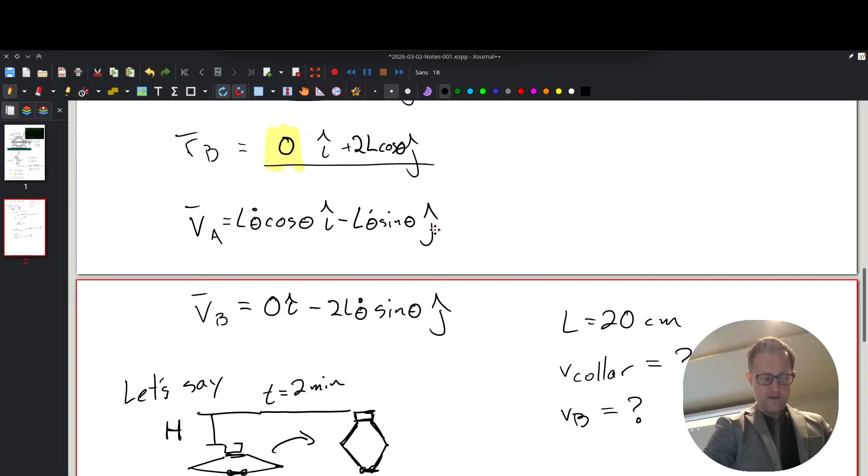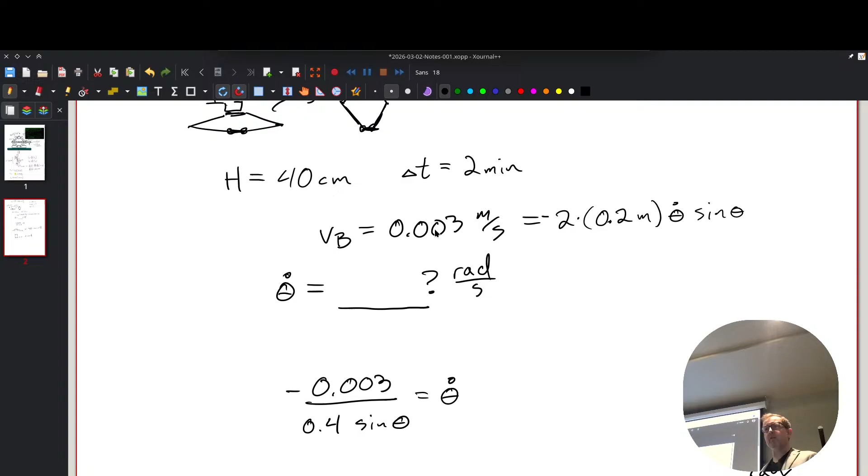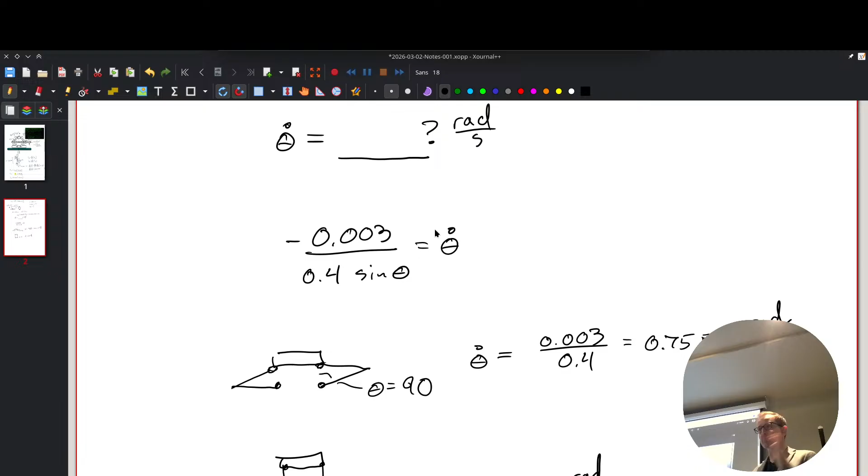The last thing we did was figure out that if we want to move the car at a constant 3 millimeters per second, turning the crank and raising the car slowly, then the angle of our jack changes at a certain rate. At one point it's 0.0075 radians per second, pretty slow. But by the time we get to the top, we need to move this thing at an infinite number of radians per second.

So the question is: is that possible? Is something wrong with the way we modeled things? Is this real? What's going on? I wanted to come back to this point where we figured out that if the top is moving at a constant rate, the rest of it is not moving at a constant rate. I wanted to come back to that and figure out how to deal with this.

What are your initial thoughts on that? Can you rotate something at, let's not call it infinity, let's call it 6,000 radians per second? Can you do that? Yeah? Maybe? Theoretically? Okay, theoretically? Maybe?

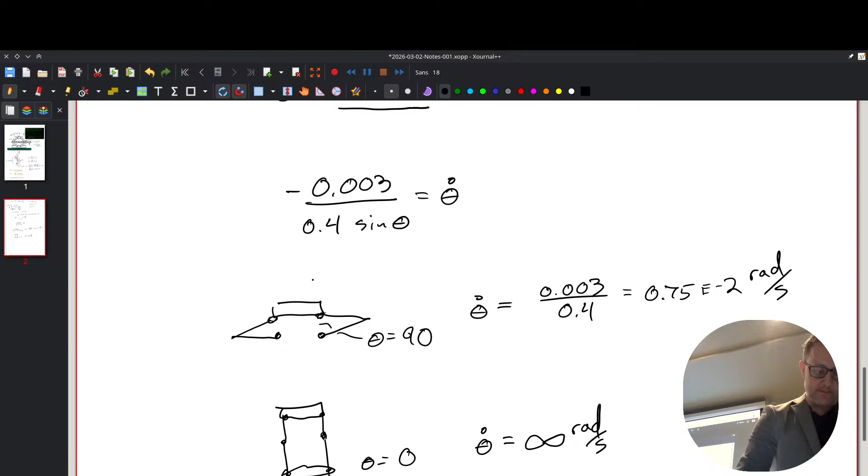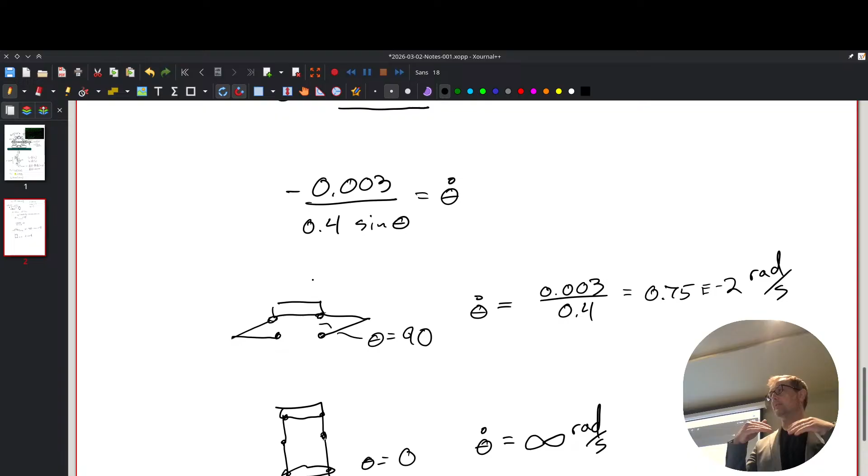But as you think about these systems, it is real—you can have real, very quick changes like that. They're not infinite, but they're big. In reality, it slows everything else down to match up those constraints.

So the question is, are we happy with this constraint that we want the car to move at a certain rate, or do we want to go back and revise that and say maybe the pin should be moving at a certain rate? Do you know what I mean by that? Since we're going to be turning the crank, rather than saying the crank has to change how fast it's moving to make the car move at a certain rate, we could say the crank's going to move at this rate, and the car is going to do anything it needs to keep up with us cranking it. What do you want to do? Sign, seal, deliver, or revise?

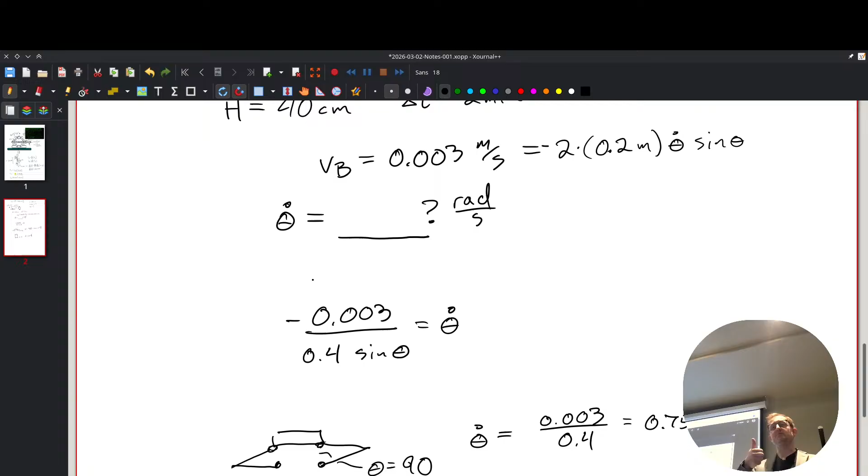This is your chance, you get to do an engineering decision. Revise our constraints, because we put a constraint that the car has to move, but we could change that constraint and say that the collar has to move. Do we want to say the collar is moving, or do we want to leave it as the car?

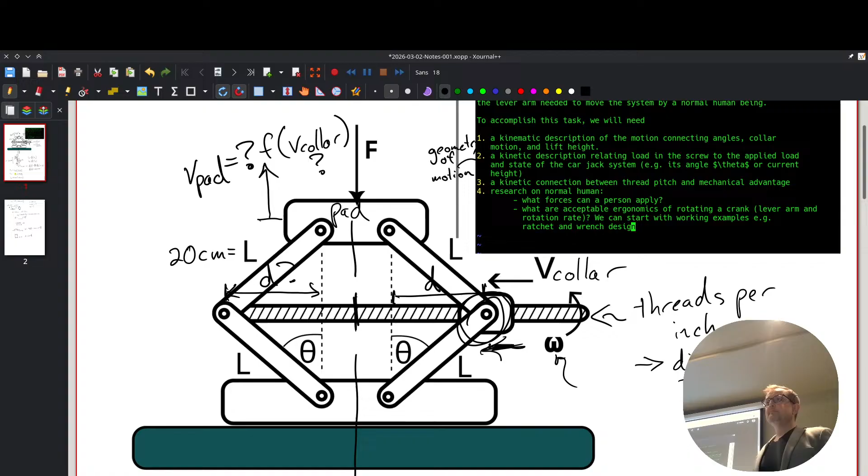I feel like since the collar is the most strange, like it's not straightforward movement, I think if we constrain that, it'll be easier to deal with the pad movement. You think it'll be easier if we go back and look at collar motion rather than just car motion? We can try it, yeah, because I feel like since it moves in an arc, it'll just make life easier if we say it's like a constant thing. Yeah, we could do that.

What do we think about that? It's more realistic to try it, but it's more constant than... yeah, if you're turning the screw, you're gonna keep decreasing the X position, right? Like that distance keeps getting smaller. Try it. All right.

So if we want the car to move 3 millimeters per second, I'm looking at my equations. Before we said the car is going to move at a constant 3 millimeters per second. Here, if I want this number to be 3, then this number has got to be double that, because this one's 2 times L theta dot, this one's 1 times L theta dot. So I could say 6 millimeters per second is my thread speed. That's how fast my thread is moving along. Seem reasonable? All right.

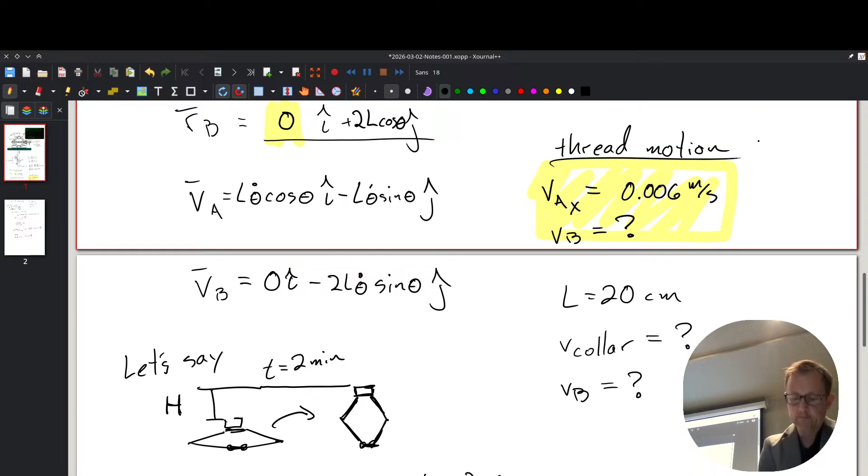So then we have this question. So if the thread's moving 6 millimeters per second, how fast is the car moving? How fast is the jack moving up? What do we think? We can give it a shot, see what we can come up with. You can even ask questions if you're not sure where to start.

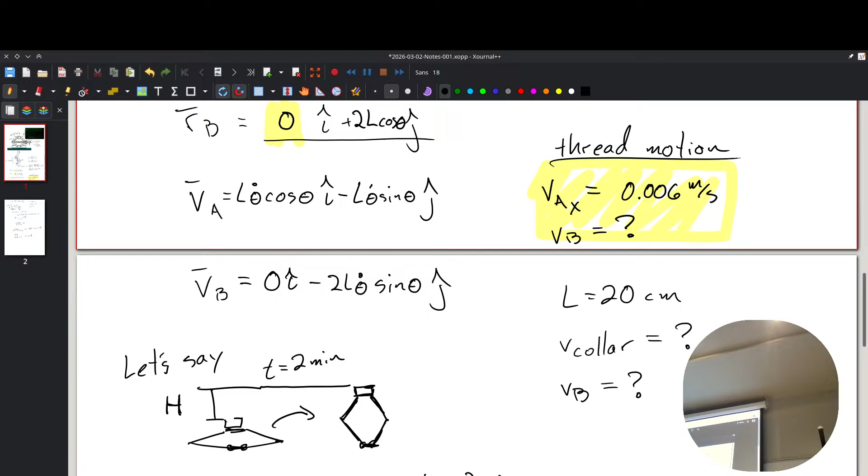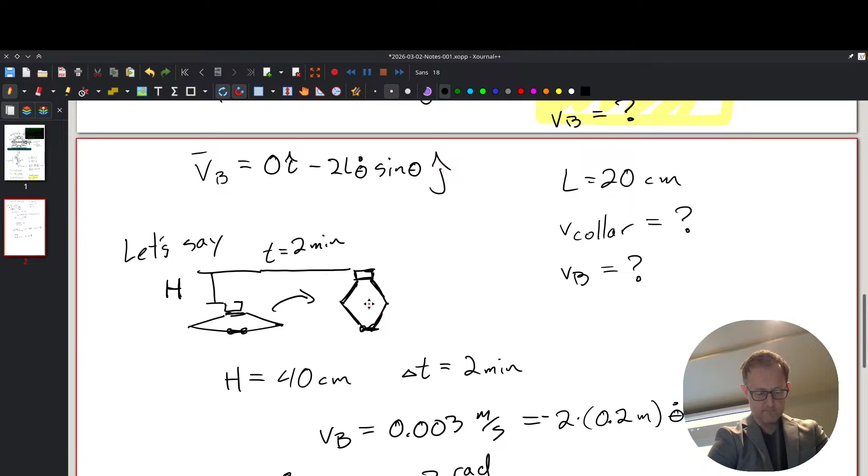So we had some time to think about it. Did anyone come up with a number or an equation for VB? If not, what questions did you come up with? Questions are just as good as answers. How do I fill in this question mark?

VA is 6, what is VB?

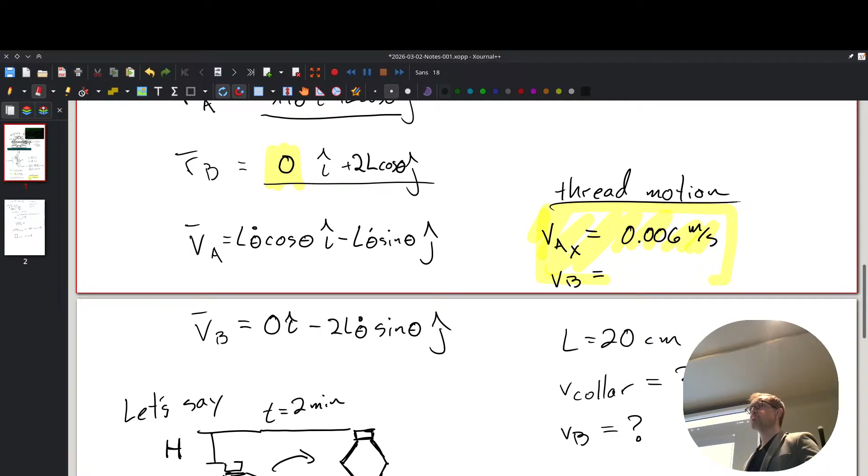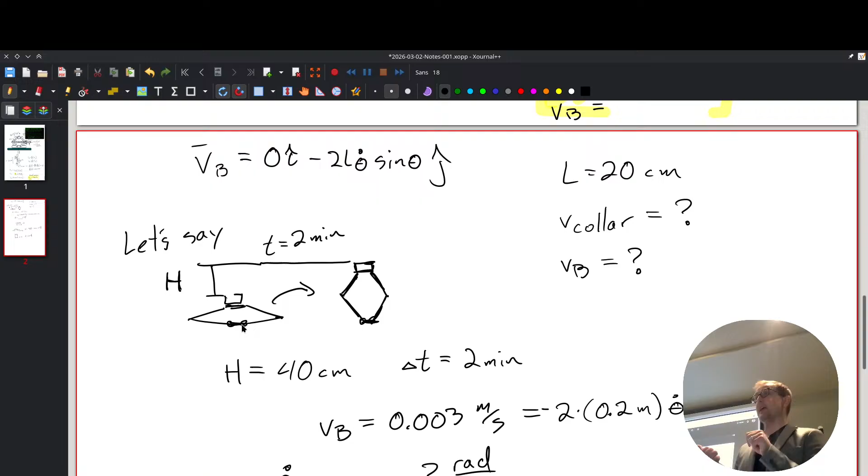VA, so on Wednesday we were talking about this - quick answer is VA is a chosen number. It's not that that number has to be for a jack. We did that based on if you're lifting a jack and it takes 2 minutes, assume that someone can move it in 2 minutes. We took total distance divided by 2 minutes and figured out 3 millimeters per second was our number. Thanks for clarifying. No, yeah, I appreciate it.

And then I doubled it, because if this distance has to be X, then we need to move this one 2X, or at least we want the speed to be 2X. Cool.

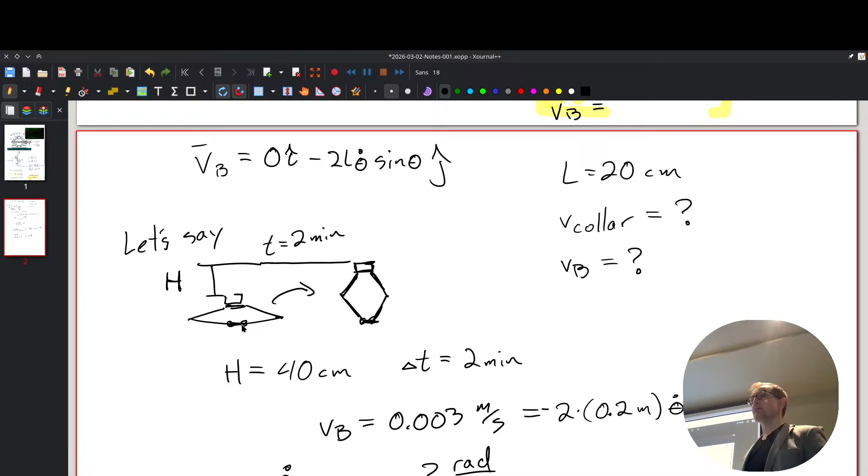What do we even do to get there? Is there a connection between collar motion and upward motion? Let's just think, do we think if I move the collar, the car moves up? Okay, so there's got to be some connection because it's still a 1 degree of freedom system. We're changing how we're actuating it. We're not saying we're pulling on the car, we're pushing on that pivot joint. There's got to be some kind of connection. Cool.

What about our constraint equations? Which one is the x component of VA? What's describing that collar motion? The L theta dot something. Yeah.

This is VA. We're saying that this value has to be 6 millimeters per second.

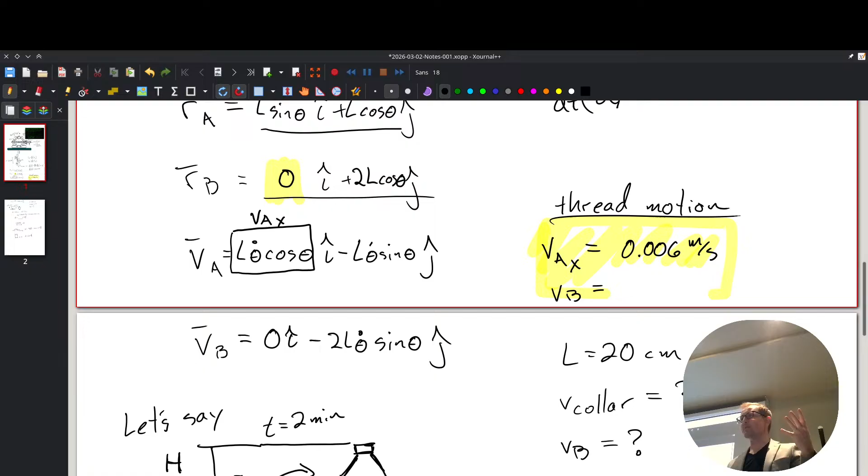Sorry, how did you get those equations? Those were given to me. I went to the top of a mountain and Moses was there with a burning bush, and he's like, from now on you will use these equations for these car jack systems. And I said, yes, thank you, and brought them back down the mountain. I'm being facetious, hopefully—it's Purim soon, so it's time to be fun.

All right, let's back up then. How do we get there?

The way I usually do constraint equations is figure out what are the variables that describe this thing. So to me, the main thing is if I know the angle, then I know everything about the car jack. And I have a mirror image of it over here, so if I know this one angle, I'm good to go.

So then I want to figure out where is A, where is B, in terms of—like what is this vector, RA? Really, I don't need that, RBA—but what is this vector, RB? Those were the two things I was trying to figure out.

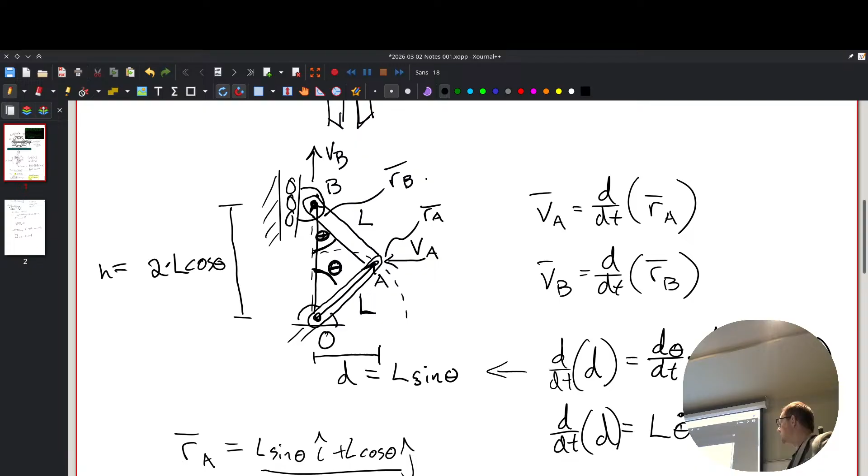And I figured out—I say it was a team effort, we did it together—we figured out RA is L sine theta plus L cosine theta. And then RB is 2 times L cosine theta, so double that, put it up top. And RB is always kind of zero in the x position, just moving straight up and down.

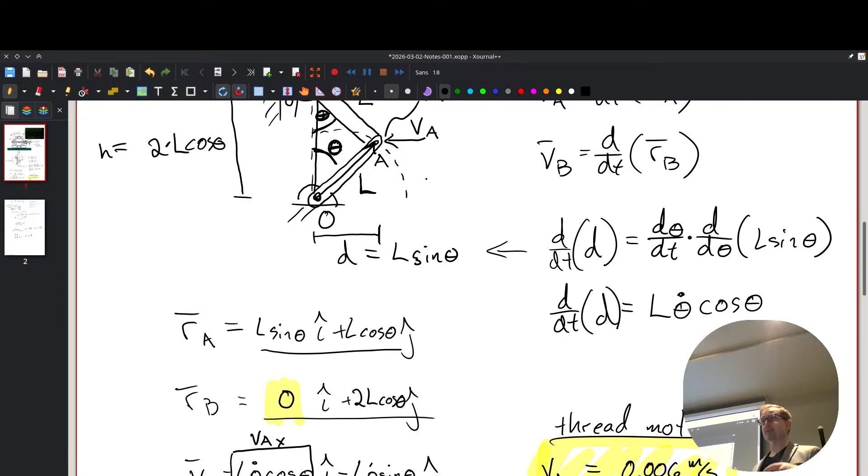And based on that, if I know constraints on position, I know constraints on velocity, because velocity is a change in position. So if it's constrained, it's still a derivative of that constraint. These two equations, VA and VB, are derivatives of RA and RB—that's where those are coming from.

And it's good to kind of walk through that. Even if you remember doing this, sometimes it's nice to walk through why we did these steps rather than just furiously writing down the math.

And it also helps because now I know that the x component is my constraint.

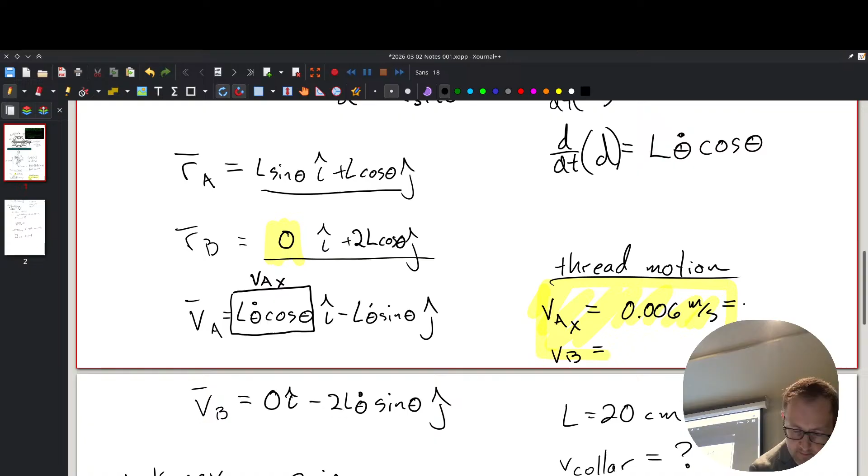Question? I was thinking, can we find theta—like set them equal, find theta, and then plug it into the RA equation? Or something like that. Or we can find VB.

Yeah, because it's a derivative, so integrating this is exactly true. Like this number we said, 6 millimeters, that is L theta dot cosine theta. And VB, this is 2 L theta dot sine theta.

So it's like we have two equations and one unknown, right? I guess two equations, two unknowns, because we don't know theta dot and we don't know VB. So we can solve for both of those since we have two equations.

How does that sound? You want to try that? All right, let's give that a shot and see what we come up with.

What was theta dot? If you think about A moving around in a circle, theta dot is how fast it's rotating. Technically, it's also the other one—rotation is going to go too, but here we've mostly just been talking about that bottom angle.

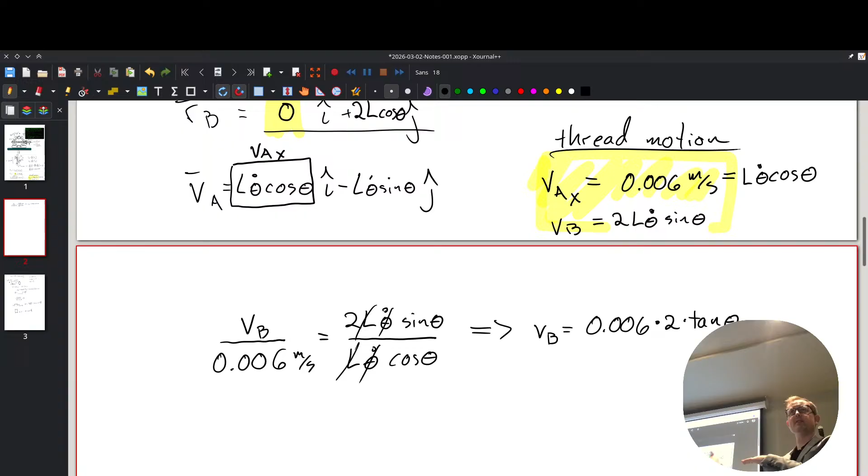Yeah, something that has to do with the fact that it's moving in a circle, right? That we're driving this thing upwards, but we're using a circle to do it. And that's okay.

All right, so when is this thing going to be 12 millimeters per second? Like, when is it moving at 12 millimeters per second? When is tan theta 1? At 45 degrees, yeah, so halfway.

That'll be like how fast it's moving when we're halfway there. What about when we're at 90 degrees? What's tan of 90? Zero, okay. A little weird. It's not going to be moving at all when it's at 0? When it's at 90? You'd say it's undefined though, because it's 1 over 0.

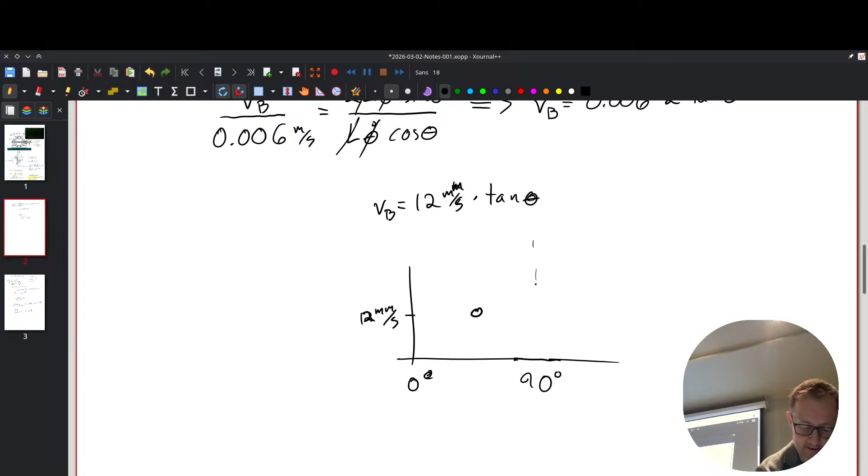Tan, is it 0 or 1 over 0? 1 over 0. All right, there's a 0 in there. All right. That's a tough part with crowd work, you never know what the crowd is going to give you. All right, so undefined, somewhere this way. That's our asymptote for tan. Okay, cool.

And then what about 0? That's our other kind of extreme. 0? Weird. Right, so we'll have some kind of curve like this, or maybe on average it is 6 millimeters per second, something.

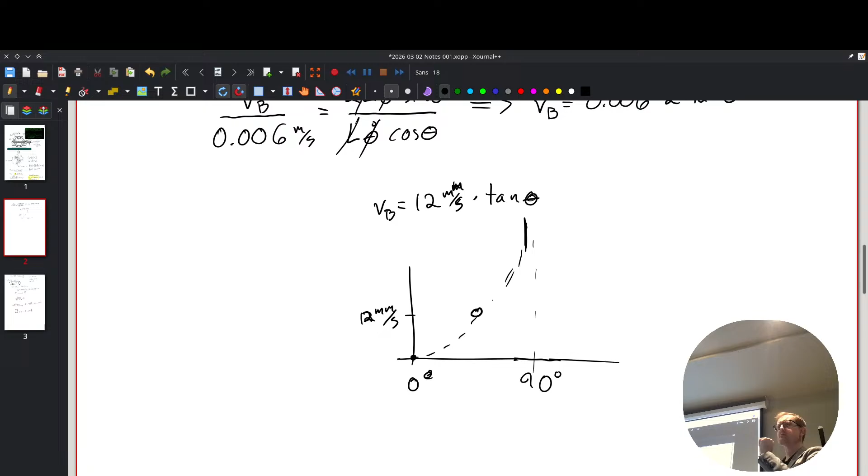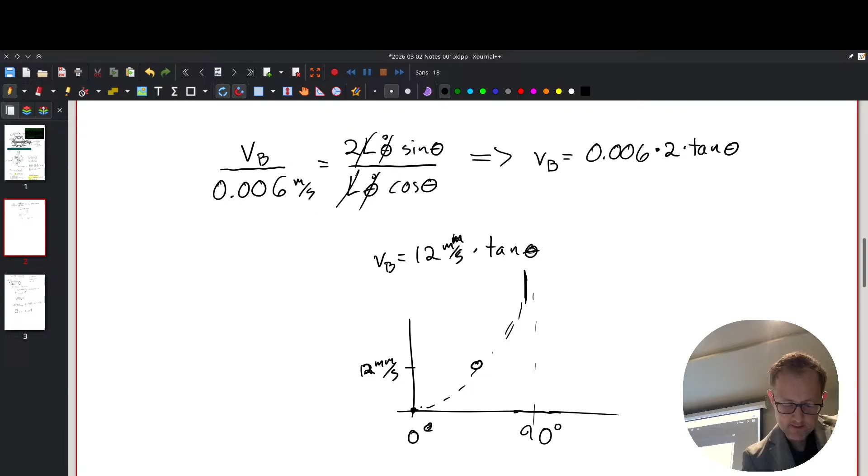What is it? Wouldn't it be like going down, like after it passes 45? Does it go? I think tan theta goes up. Which one? Zigzag? Sine 0 over cosine is 0. Oh no, you're right. Yeah, no, it increases. It's right? Okay, all right. I think it makes sense to me, but I'm not sure.

So it's a little weird, but we're not talking about things that the human doesn't have to make it move 20 or whatever, 20 meters per second. It's just the system will respond that way. Like we're just gonna move the screw at a constant rate, and we don't have to worry about everything else moving quickly. And we have a screw, we have something like keeping it in position, so it's not too big of a deal. It's a little, the beginning's a little weird, like when it is flat, you're gonna drive the screw in, but really, it's gotta like pop up. Most of the motion is upwards rather than inwards. But that's okay, we'll get there.

All right, that was fun. But now, nice part is we've got this relation, and we could even make it more general. We chose a number for VA, but really we could say VB is 2 VA times tan theta. So even if we go back and change, like, all right, I don't want to move it at 6, I want to move it at 10 millimeters per second, we have a general kind of relation between those. Because we did all the math work ahead of time to get to that point.

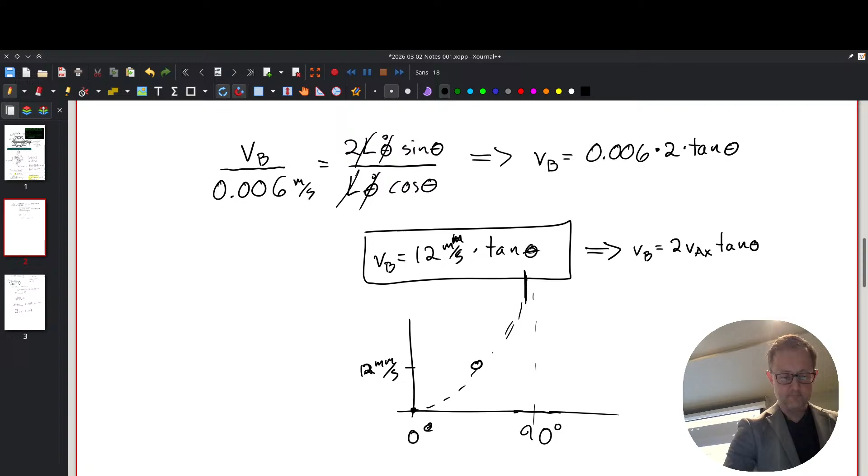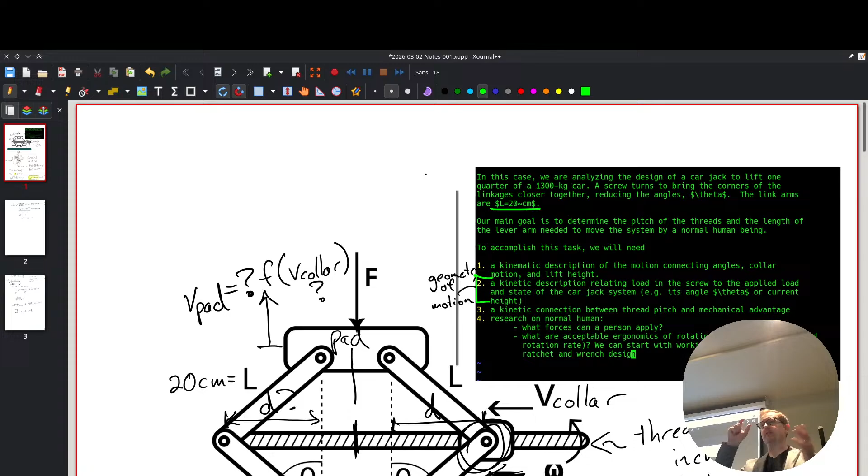I'm gonna scroll up and then come back down, because the next thing is trying to figure out our kinetic description for how much load the screw is holding. So we're turning that crank, and the screw is trying to hold the whole weight of the, not the whole weight of the car, but a quarter of the car. We said maybe a quarter of the weight of the car on Wednesday or Friday.

So now what I want to do is figure out what is the load in that screw. It's probably going to change. Like we already saw that motion depends on the configuration as the thing's moving. But that's the next step: what is the load in that screw whenever we have that load of the car?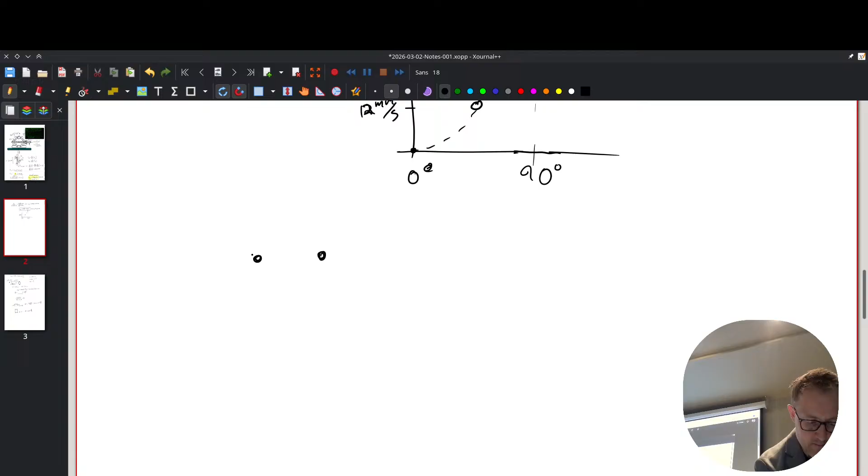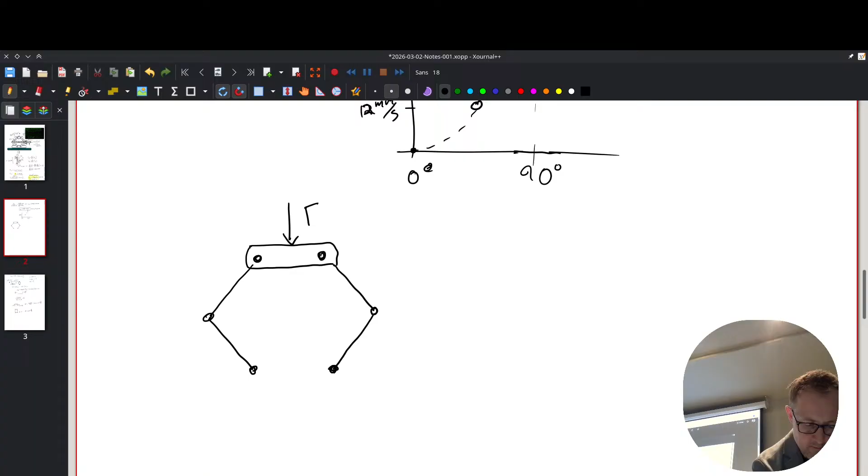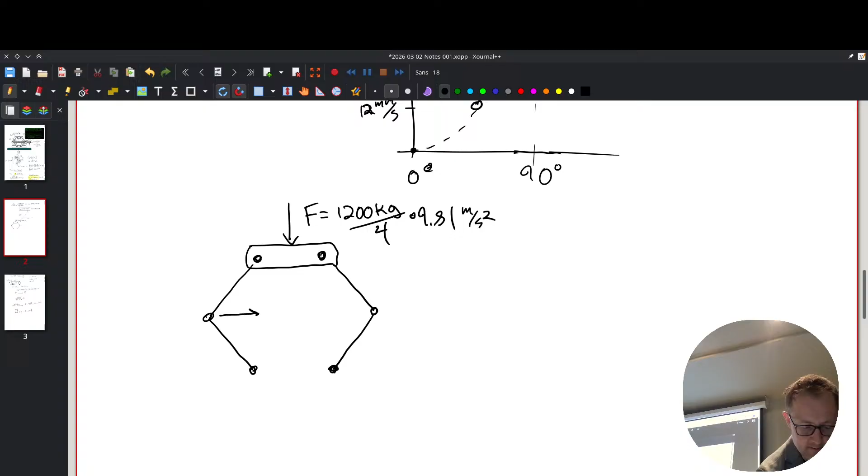We'll put times 9.81, so we have newtons instead of, so that I know that this is my applied load, and then let's do this. I know this is my applied load. The tension in the screw is the load that I want to figure out, like how much force that screw needs to hold.

What other forces do we need to look at? How do I finish off? What am I starting to draw here? The free body diagram? Yeah, so free body diagram. What's missing? Any other forces on there?

Yeah, there's gotta be something keeping it from going down, right? Right now everything's inward and down, right? Something, right? Yeah, I agree. You have the normal force of the ground pushing like that. Yeah, the ground has gotta be there somehow. Yep.

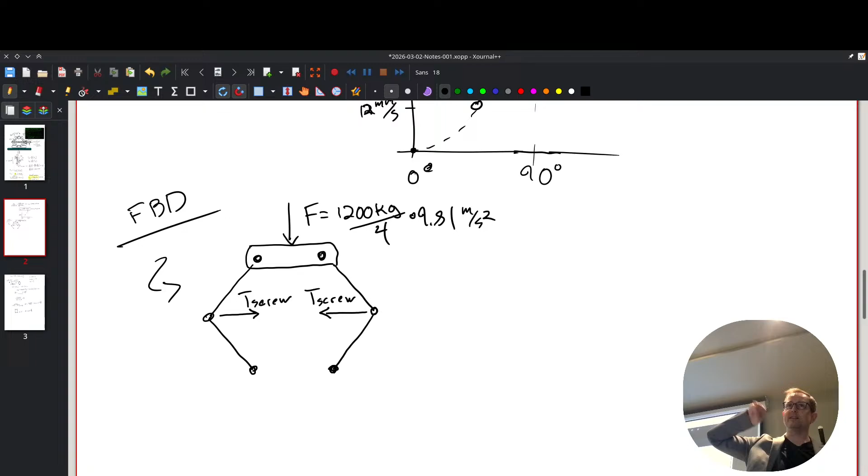In terms of the universe as a whole, the free body diagram is just a dot. There's nothing happening, no external forces outward, other than like, I don't know, God's finger to get the universe started, the initial impulse, depending on your view of the universe, or the spaghetti monster. Whoever you think started the whole bang.

On these side corners, we have the tension screw drawn. I drew it as an external force because really I'm considering: if I remove that screw, what is the force necessary to keep this thing in the shape that the screw was holding it in? So that screw force is an internal force. I just took it out of my free body diagram and drew it in there anyway.

That was like those cuts, like in statics to beam dynamics. Make a cut, make a little squiggly line, then you have a moment, you have a shear force, all coming back. It is all connected, all this engineering stuff. I know sometimes it feels disconnected, like memorize the equation, plug in the numbers, get the answer, move on, forget everything. But it is all part of your work.

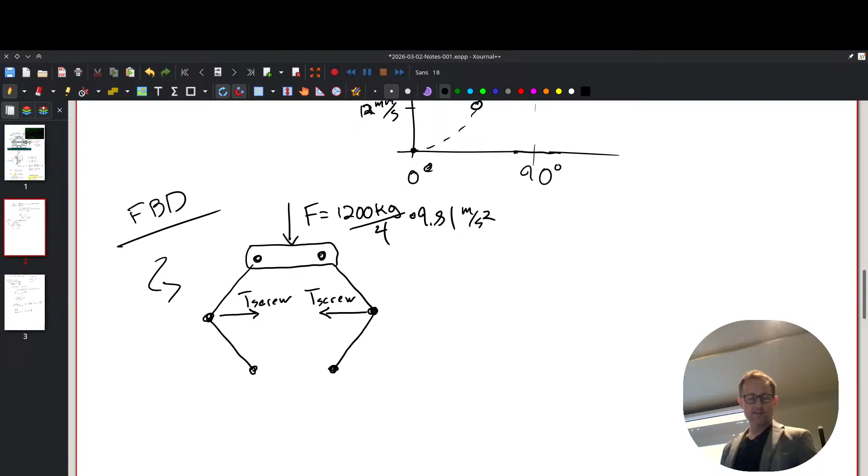So then next, people noticed there's got to be some normal forces, right? Something like this.

Here's another tip: if there's a hinge, there's always two components of force. Sometimes one of them is zero, but there's got to be two, because the hinge does not let it move in X, and it doesn't let it move in Y.

And that's why we started off with kinematic descriptions, because we were figuring out where's everything fixed. So if I have a hinge here and here, there's some symmetry, so I'm going to make a quick assumption: there's got to be some Rx this way, some Rx that way, right? This one, I didn't see this one, that's why I was kind of explaining why I'm putting it on there.

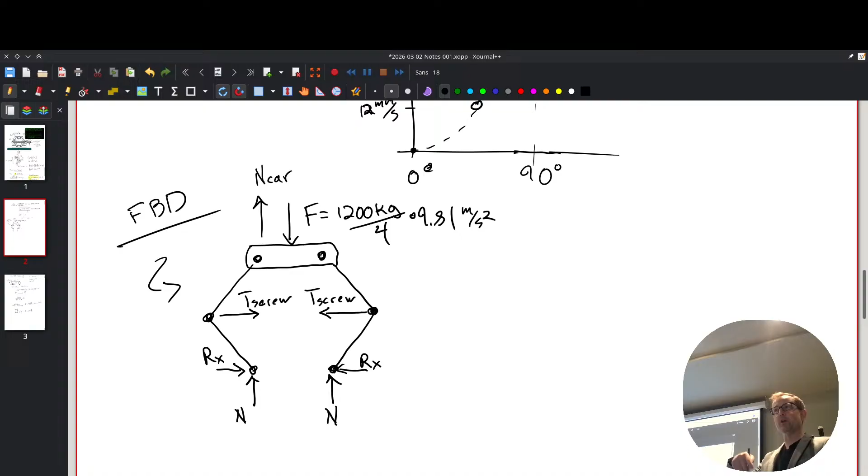Would there be the normal force of the car at the top plate? Is there something this way from that's equal to the force pushing it over there? Oh, okay, it's catching up. I think that's right there. And then instead of the two N's down there, I would write RY. Some people are pointing out it's touching the ground, so normal, or you could call it RY.

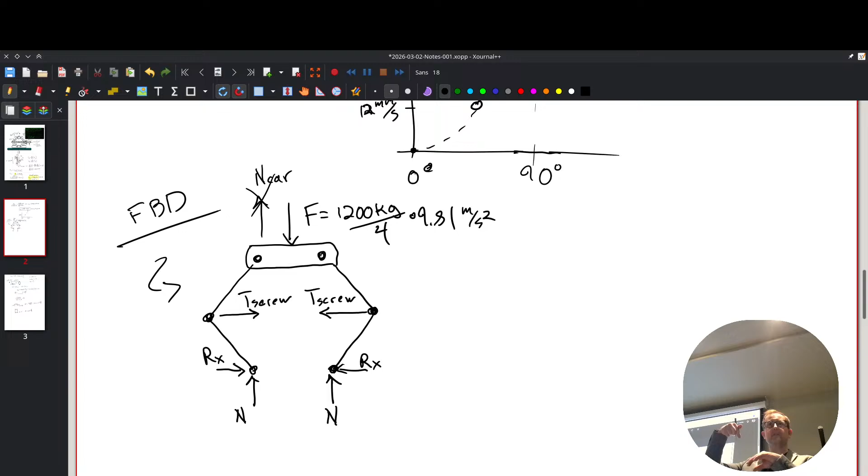But this normal from the car—this one wouldn't be included in here because the car is not part of my free body diagram. It's sort of like removing and saying, what is the force that the car creates by being in contact with my jack system? A lot of this academic stuff can be kind of pedantic, like what's external versus internal. Technically everything's an internal force if your free body diagram incorporates enough stuff, but we want to make it small enough that it's simple and kind of helpful. So we can't include both, because if you include both the normal up and the force down, total force is zero—now there is no...

Now we're just moving a jack, just for fun. It is pretty fun, like a fidget spinner, I guess. Just a 30-pound fidget spinner. I guess they're not that heavy, maybe like 10 pounds.